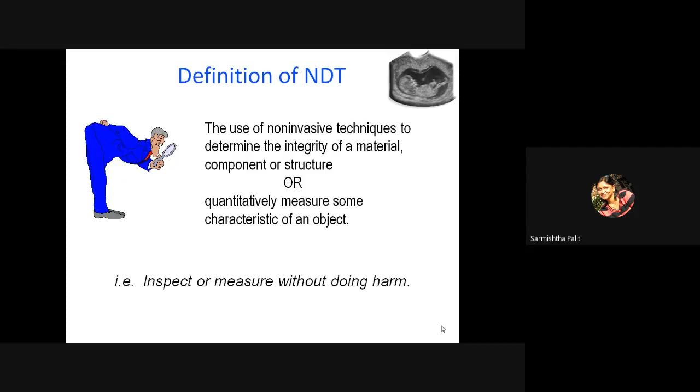And if you see the applications of NDT, it's very, very wide. From underground pipelines to spacecraft, it covers the whole gamut of our globe. You can talk about anything. You can talk about airframe, iron and steel company, oil and gas, underground pipelines, railways, spacecraft. Everybody needs safety. Everywhere you need reduced maintenance and increased life. All these three are interlinked.

If I can increase the life, I can save lots of cost. So everything is also connected to cost. If I know what is the exact situation, I can pre-plan when I will do the maintenance. So it will reduce the maintenance. Same for our own body. If you go for a regular checkup and you know what is the status, you can have proper medication. And then you can improve the safety of your life. Similarly, here also you can improve the safety.

Can I mute your mic, all of you? Thank you.

So exactly you can compare material with human body and can understand this subject much better, because the way we understand ourselves, nobody can understand in that way. And that is the best way to learn NDT for material and component. Chandan, the next.

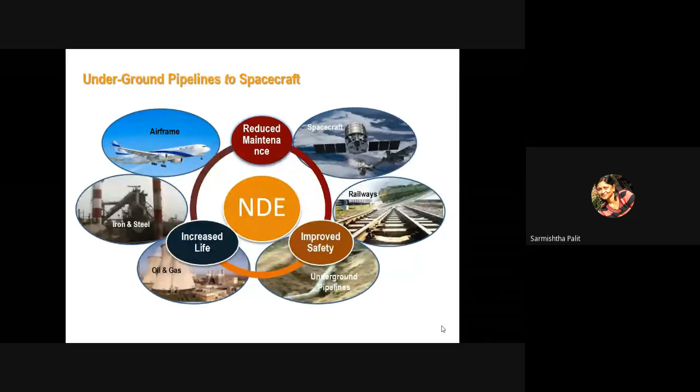So when you find the wide applications of NDT, a large number of techniques are also evolving. Just like in our case, CT scan, NMR, X-ray, ultrasound, and every day you are getting new names of medical techniques. Similarly, for NDT also a large number of techniques are evolving, but the 6 most common NDT techniques I have listed here. And if you look at it, 2 techniques I have marked in a different color because these are very known to you as they are used for your own body.

So as I already told, NDT involves development of measurement and analysis technologies, because I'm trying to give you a sense why electronics and computer science are so important in the area of NDT. It's a measurement and analysis technology. So all measurement and analysis technology needs good electronics people, good analytics, then quantitative characterization of materials and structure in a non-invasive manner.

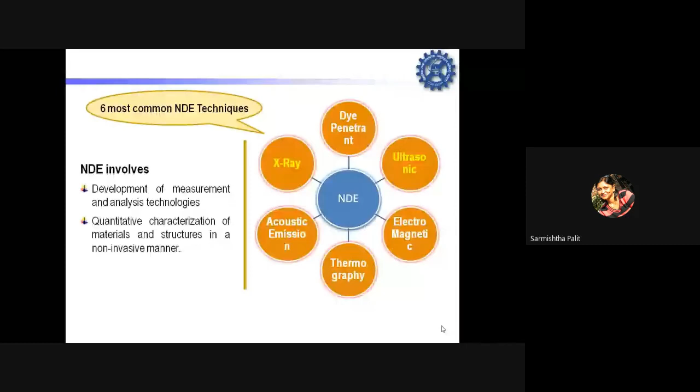So the moment you are talking about quantitative characterization, you need artificial intelligence, you need big data analysis, maybe machine learning, deep learning. So all these are an integral part of NDT assessment in today's scenario. Next. As I told you, most of my presentation will cover ultrasound. And I know everybody is aware about what is ultrasound. I don't have to talk about it.

But it's a mechanical wave. And when the crystal vibrates at a particular frequency, that frequency of wave propagates. And the frequency range is normally 20 kilohertz and above. In NDT, the normal frequency we use is 20 kilohertz and above, and nowadays it can go up to 100 megahertz. So the frequency range can go even up to 100 megahertz. And many applications, as I have already mentioned.

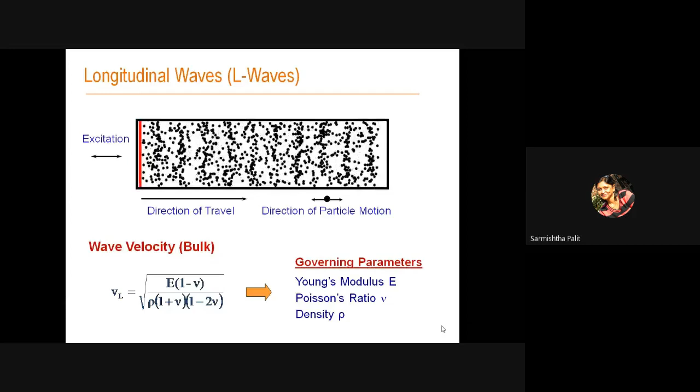And the other is the transverse wave. Here the direction of travel and the particle motion are perpendicular to each other. And as you know, there is no propagation, because you can see only the shear modulus is coming. So there is no propagation through liquids and gases. So whenever we talk about fluid mechanics or fluids, if you want to get the fluid velocity, you have to use the

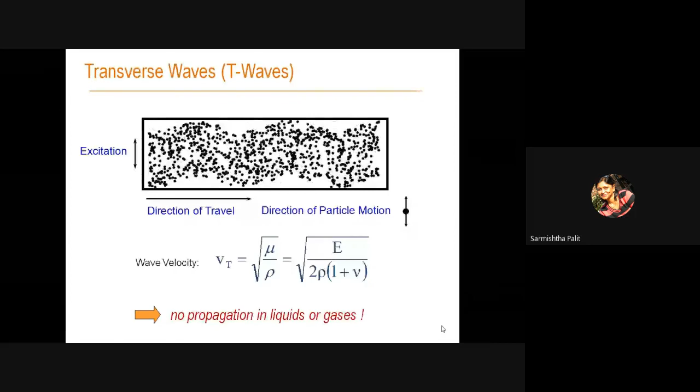longitudinal wave. And these things are important because when you design a sensor, you need to know what type of sensor you will use, so what type of wave has to be propagated. Accordingly, you need to make your own sensor. So all these parameters are important to look into when I am having my own sensor or I have to fabricate my own sensor. Go to the next. You can skip, you can go to the next also. I'll talk about it. Then skip.

Yeah. So now coming to the different types of transducers for ultrasonic testing. As I told, the transducer or the sensor is the heart of the measurement. That means I have to generate the sound wave. The first thing is the generator. If I don't have the sound wave, how can I get the information of the body? That means I need the sensor. So there are various types of sensors available. How will I construct the sensor? Go to the next.

So this transducer could be of different types of material, but it should have the property of converting from electrical to mechanical, or mechanical to electrical when I am receiving. The best possible way is using the piezo sensor, piezoelectric material. Go to the next, Chandana. So it could be piezoelectric material, or it could be laser. It could be an electromagnetic sensor like EMAT.

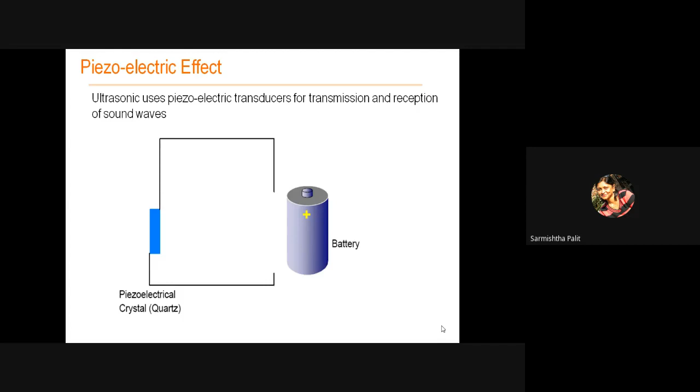How does the piezo effect work? Basically, the crystal has some thickness. Whenever you make the crystal, suppose it's quartz, it's of a particular thickness. Now click, and then click. If you connect it, depending on the polarity, the crystal thickens and then thins again. Click it. Yeah. So depending on the polarity, it will be thicker and thinner. But now think, if we are giving a sinusoidal wave, there will be a continuous change in dimension, and that will go as a sound wave which propagates as per the frequency of your excitation. Go to the next.

So when we talk about basic piezo material, we always talk about the quartz crystal. But there are many disadvantages of the quartz crystal. The first thing is it's highly anisotropic. With a highly anisotropic material, if I want to generate the wave, it will be very, very difficult. Cutting is also another problem. So that's why we came up with the man-made materials.

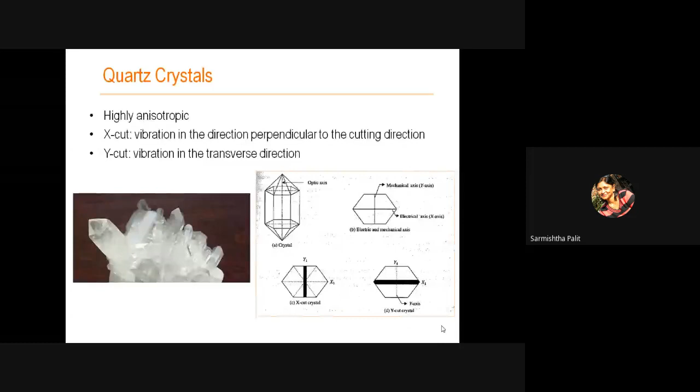Here is the research: what type of material you can produce, you can make in your own area. So semiconductor people are fully required here. It also depends on how good you are in material development, being an electronics engineer. So among man-made materials, many have come up, like barium titanate and lead zirconate titanate, PZT, which is the most used material. Also now lithium niobate, because if you want to extend to high power and higher temperature, there is a need to develop many new materials which can sustain high temperature.

Because for most of these materials I am talking about, their Curie temperature is about 400 degrees centigrade. Now, when you go for high temperature components, real-time data analysis, you are handicapped. This material you cannot use. So there is a completely open gap where you need to do some research and develop material which can sustain high temperature. This Curie temperature you can change. So think of material which can be used for high temperature. Next.

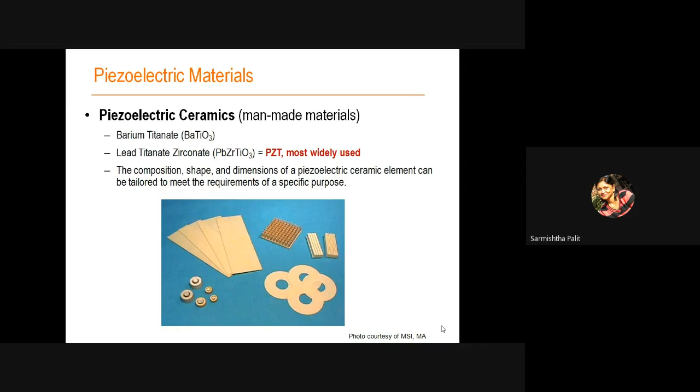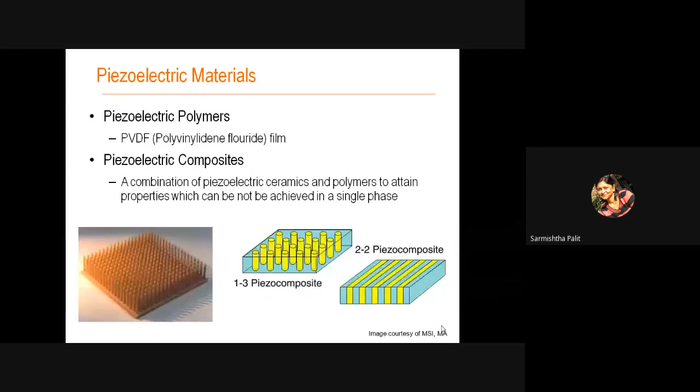So similarly here, the man-made ones, these are the polymers. Go to the next. A large amount of research work is going on, even in academic institutes, to have thin film, spray type piezo material, which you can simply spray on the component and that can act as a sensor. So it's a very, very open field where a lot of research can be done.

So in most of our research, we find that in academic institutes we sometimes stop our research at material development, and that material remains in the lab. And there we are lacking, because we don't go up to fabrication. If we don't go up to fabrication and its applications, then most of the research I find is confined only to papers and not beyond that. It is now very much required to come out of this comfort zone of research and do research which is industry applicable, which has some applications, so you can make at least one device or fabricated thing which is useful for society or for industry.

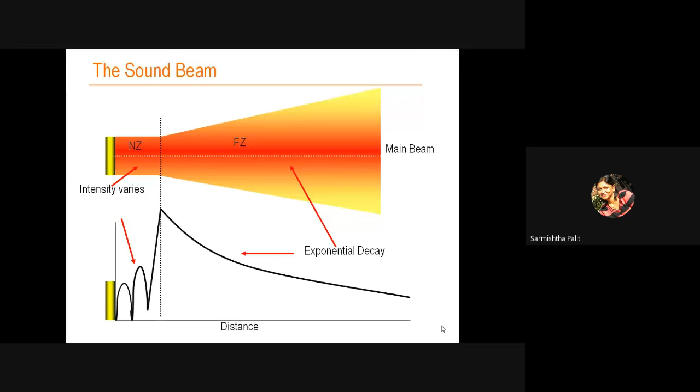Yeah. So there is an equation for the near zone. What are the things in my hand? In my hand is the diameter of the crystal. I have the frequency and the velocity. So the near zone is dependent on all these parameters. So I can play with this and know, if it is a high frequency application, what will be the diameter, because that is the main part which is in my hand. So all these you can characterize when you are fabricating a sensor.

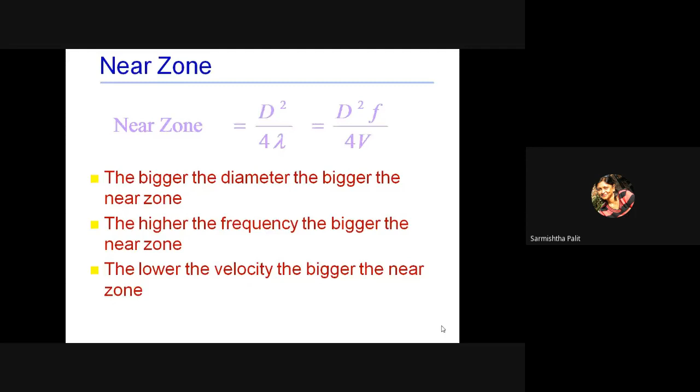Similarly, the beam spread, because if it's spreading more, your energy is basically becoming more diffracting, so not confined in a particular position. So more divergence, not convergence. So I have to reduce this beam width. If we have to reduce this beam width, that again is dependent on the diameter and frequency. So depending on what frequency I am using, you can steer these parameters, how you want to make it and for what applications you are going to use it.

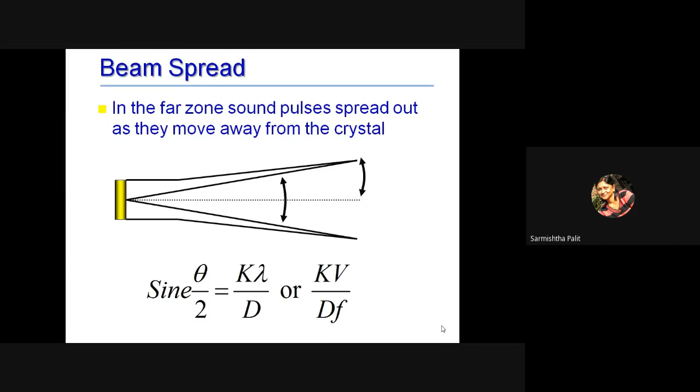Go to the next. Next. Yeah. So go back.

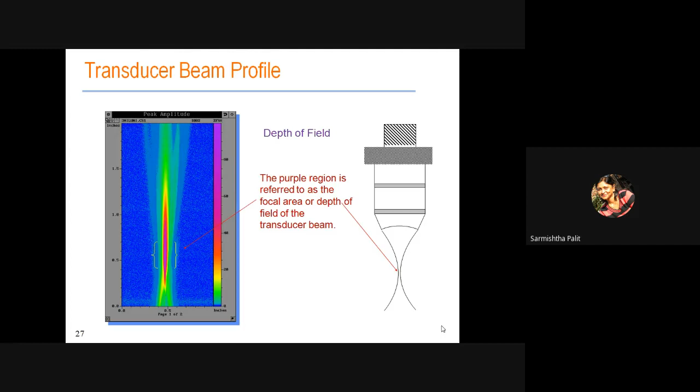Yeah. And all this analysis you can also do. So one was how the beam path will be, and second is, suppose it's a converging beam, then how I will make it, what is the focal point of the sensor. So that is also all you can steer by making your own material, by changing the thickness of the material and the dia of the pellet. So all these are very, very important parameters when one is designing, developing material for ultrasound applications, and after that wants to apply it for industrial or practical applications.

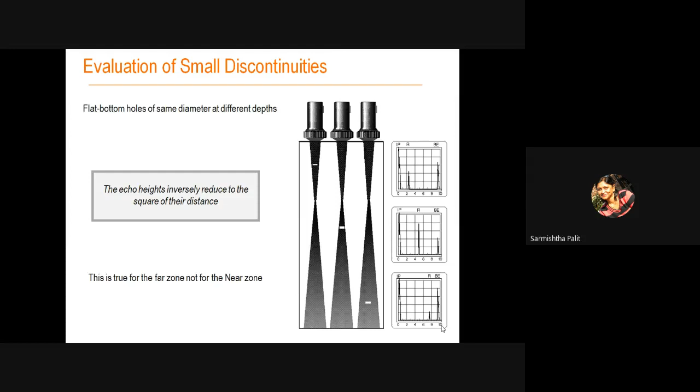Now, all these things I was talking about point to point. It's very tedious, going point to point and measuring it. But as we all know, with vision, when we see something, that is more interpretable.

So then how will I see? That means I have to make an image. How can you make the image? That means you have to scan in a raster mode. So that's called the C-scan. So there are three terms very much used in ultrasound: the A-scan, B-scan, and C-scan.

What is A-scan? It is actually the raw signal, what you are observing. So time versus amplitude signal is the A-scan. What is B-scan? When I do the line scan, that means I am not going to the depth, only X and Y that I am following. What is C-scan? When I get X, Y, Z and the amplitude. So that is basically my full image intensity graph. If you plot, then you will get the whole image of the thing. Just one next slide example will give you a very clear-cut picture.

Go to the next. Go to the next. I don't want to explain this. Go to the next. Yeah, next. Yes. Click.

Next. Stop. Yeah. So here you can see basically there was a block which has some side drilled holes, some flat bottom holes, and the steps. In this case, what are the A, B, and C scan? The left corner top is the A-scan, which is the raw signal. You can see there are multiple reflections coming from the back wall.

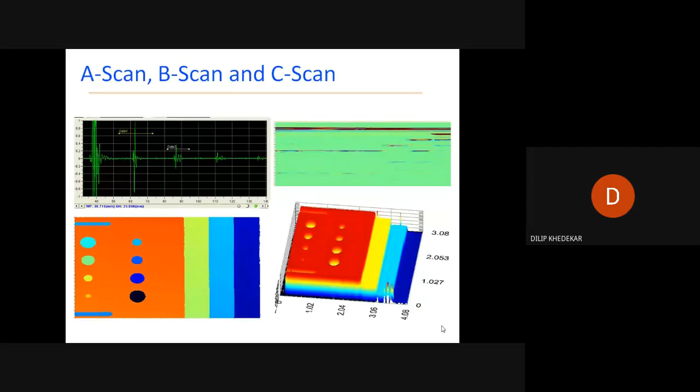The right top is the B-scan. The left down is the C-scan. You can clearly say there are different holes. The color is giving you the depth of the hole. And the right down is basically the 3D view of this. So exactly like I have shown you the baby in a fetus. Go to the next.

Now, how can you use all these things? So basically, ultrasound has enormous applications. You can have flaw detection, you can have corrosion mapping, you can assess the bond integrity, you can measure the thickness, estimate the grain size. Whatever you talk about, you can get from the ultrasound. Go to the next.

Yeah. Click, Chandan, click faster.

Yeah, stop it. So when you do the imaging, one disadvantage of ultrasound is sound cannot propagate through air, because there is a very high impedance mismatch between the metal and the air. Because of this impedance mismatch, most of the energy will be absorbed in the air and no energy will further go into the material.

So you need a coupling material. If any of you have gone for ultrasound, you have seen they put some gel on your body because that acts as the coupling between the sensor surface and your body, so no wave energy is absorbed by air. Now, if I have to do the imaging, I cannot put this probe onto the sample. Then I have to use a non-contact method, that means I need some liquid coupling.

Here's an example of how you can generate the macro structure of a body. Basically a cast billet, and in the cast billet two types of structure appear. The image nicely shows the structure: columnar and equiaxed zone, and also the central zone, which is basically the porous zone.

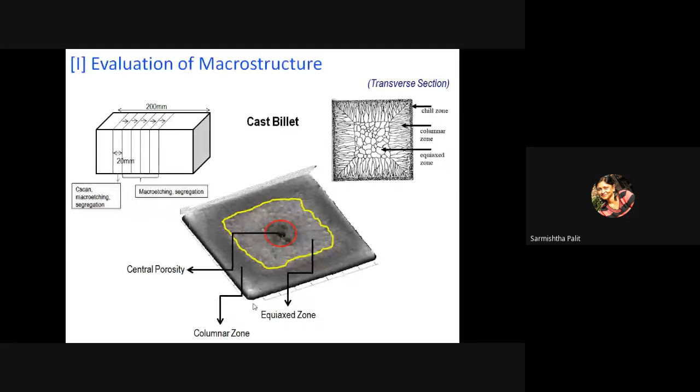Same has been used for corrosion. You see many places with corroded pipe. Corrosion could be different types: surface corrosion or pitting corrosion. If there is a pit, this is a very dangerous thing. It acts as a failure point, an initiation of a crack zone.

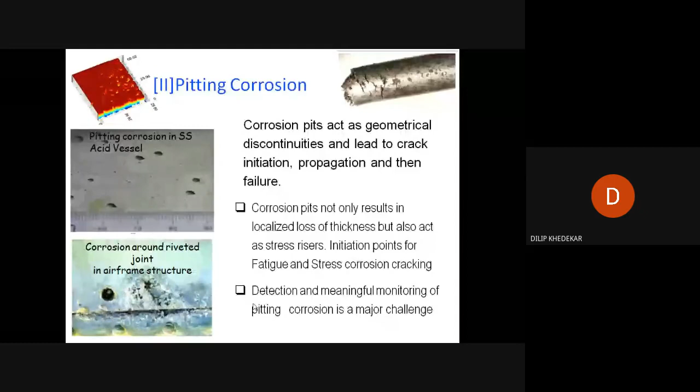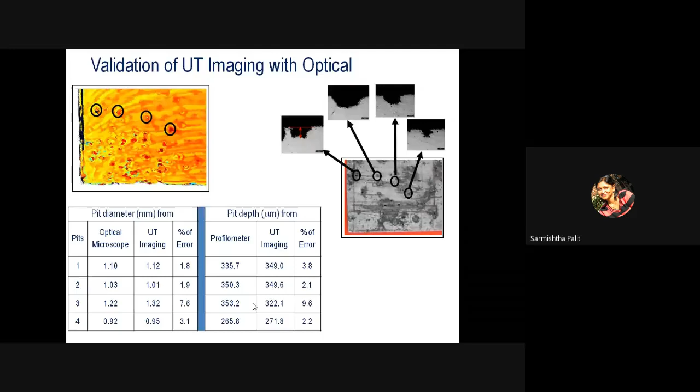This you can also image by ultrasound. We have done this by comparing with a destructive technique and showed that by UT imaging you can exactly reproduce the data which can be done by two destructive techniques, one optical and another profilometer. That means depth and size, both you can get by only UT imaging.

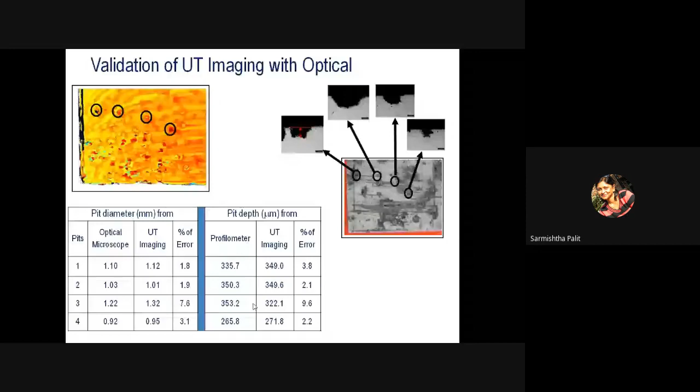When we used the systems we purchased from abroad, which we import, we found some loopholes, things we were not able to use properly because of limitations of the equipment. There you need your own things to be developed.

Here is one example of software developed by my students. When doing this analysis, we found that if the defect shape is not proper, we were unable to analyze the depth and size using the inbuilt software supplied with the system. So the software has been developed at NML for proper analysis, a full image processing software on MATLAB. This shows what background is required.

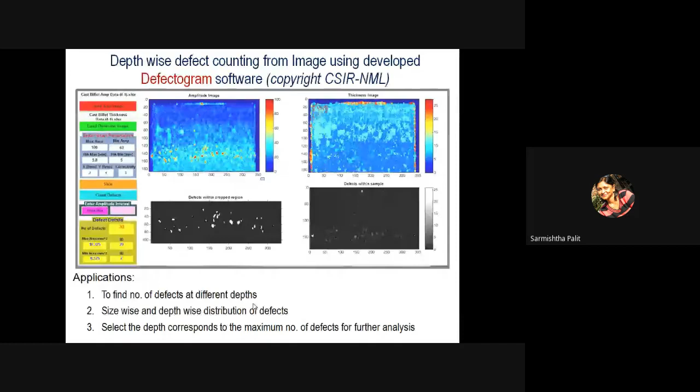Till now I was talking about a single sensor doing point-to-point scanning. But is it possible for the human body to use a single point sensor? You cannot, because it will take a lot of time to diagnose the problem. So for the human body we use what is called a phased array sensor, an array sensor. Now how can you make an array sensor?

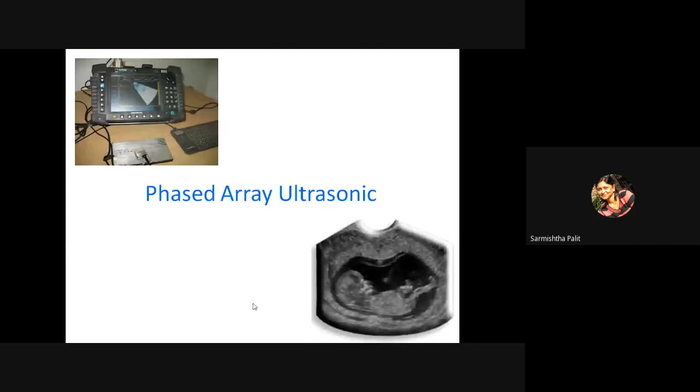Just click, Chandan. Stop, go back.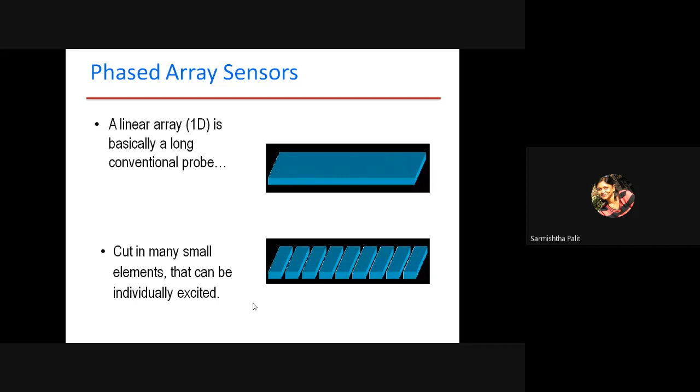Each element is given a different delay, and based on how you give this delay, it can merge as a converging wave or diverging wave and focus onto a particular flaw or place you want to check. Like if there is a stone, it focuses exactly on the stone. To generate a beam, the various probe elements are pulsed at slightly different times, full electronics. By precisely controlling the delays between probe elements, we can choose the focal point or focal spot size of the element.

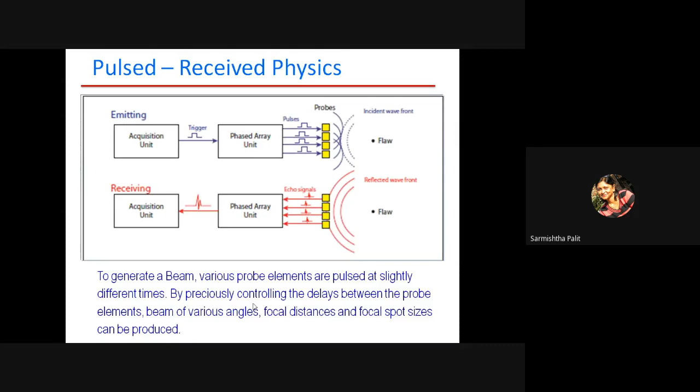This is already explained.

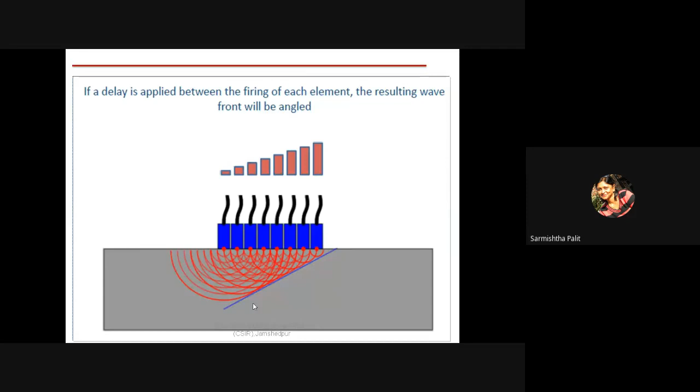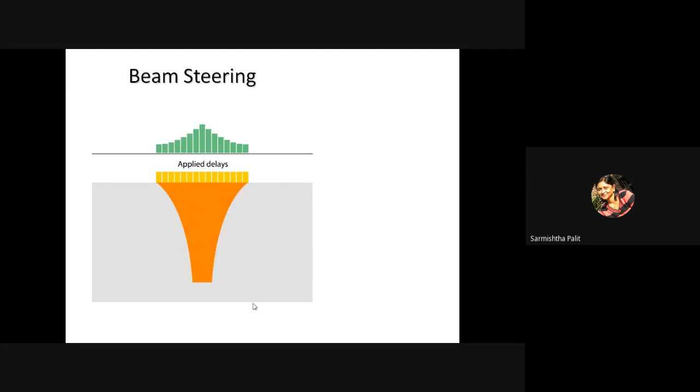You can even do beam steering, because if you create beam steering then you can do a sectorial scan. If you do the sectorial scan, you cover a large area in one go, from 35 to 70 degrees, a large range of inspection angles.

Multiple modes with a single probe, meaning you can create both longitudinal and shear waves.

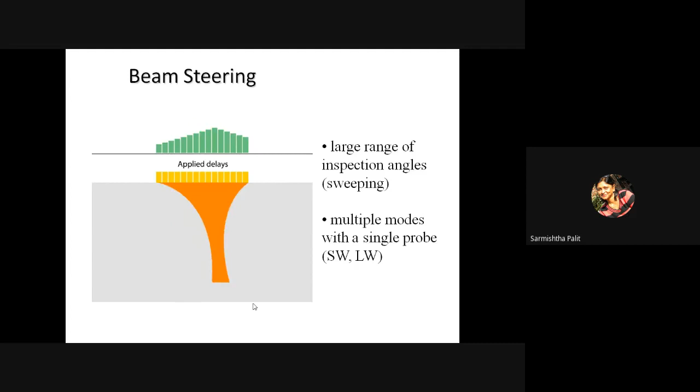Two types you can create: the sectorial scan and the linear scan. Depending on your application, you can apply either.

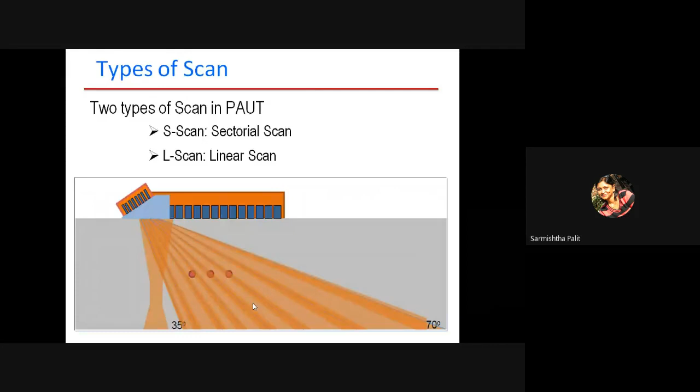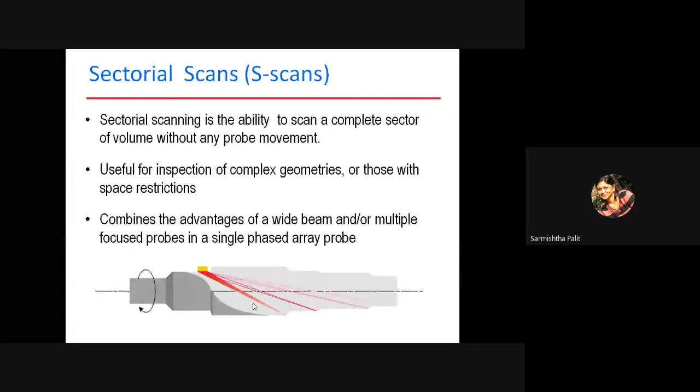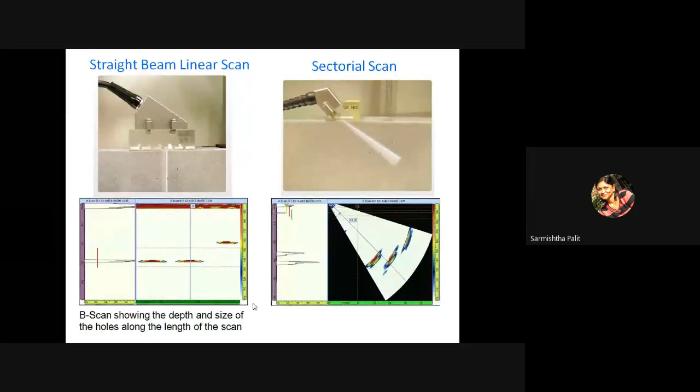These are some of the applications of the phased array where you can see the corner crack. And if you see the holes here, small holes, how it is reflecting here, all positioning you can find out.

Here is just the difference between those two. Here I just want to say a couple of things.

Now, ultrasound, mostly whatever I have talked about is diagnostic ultrasound. That means first you see and then you give the medicine, you can do the diagnosis. But this can be used in both ways. It could be therapeutic also. How is it therapeutic? If I use a high intensity ultrasound, this can be used for treatment of some cancerous cells, tumors, cysts. That means you can directly burn it. So ultrasound has both types of applications - it could be therapeutic, could be diagnostic in the human body.

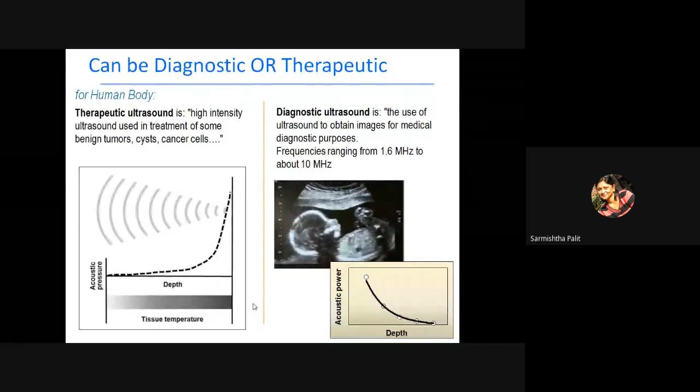Similarly in material. So in case of material, this therapeutic ultrasound can change the microstructure of the whole material by doing a high intensity ultrasound. And on the right side, just like the human body I showed, it is diagnostic, because if I know is there any crack, is there any delamination, is there any void, I can do proper treatment or proper diagnosis to remove those cracks if it is on the surface, or I can discard that material. So the same thing applies in both cases.

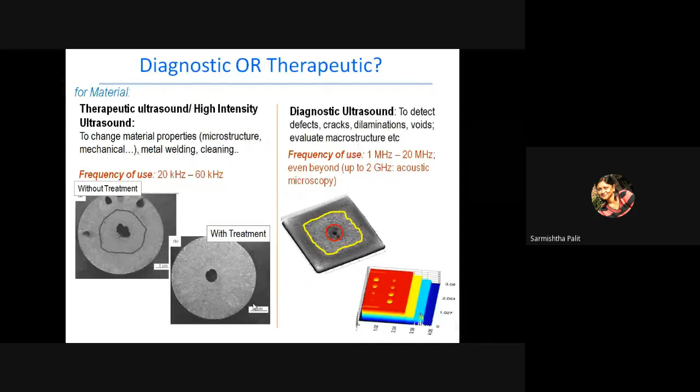Next. Okay, go to the next. Yes, so actually that was all those.

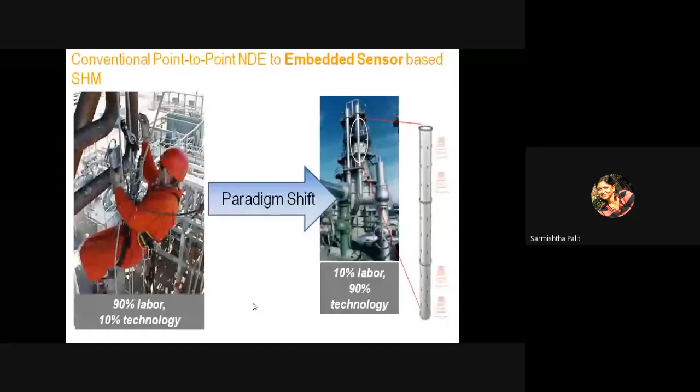I think for nearly 1 hour I talked mostly about some basic things, which is the conventional point-to-point NDT. But today, when I talk about point-to-point NDT, it mostly takes a lot of labor. And nowadays, if I talk about 90% labor and 10% technology, most of the industry will tell me we don't need this technique, because it's only killing our time. So think of something which is technologically very advanced. How can you do that? That means you can do it by embedding your sensor on the body and get the information sitting in your control room. So these are the couple of things I'm going to talk about in my next few slides, how you can do that.

We'll start with one very good work with ISRO. That means here the application of piezo sensor, which I was talking about continuously till now for fault detection, imaging, or getting information on delamination or crack - the same piezo sensor, we are using for life assessment of spacecraft on board.

So what was the motivation and need? Maybe it is known to many of you, but maybe many are not aware, that in the whole space, India has only a 5-degree allocation for keeping its spacecraft. And these spacecraft's life till date is being predicted or estimated through the bookkeeping method. That is, all the result has been done on the ground, and all types of misalignment, main thrust for putting it from the geostationary orbit, all is done there, and how much fuel is getting exhausted - that result is collected, and from there the life of the spacecraft at 12 years has been estimated.

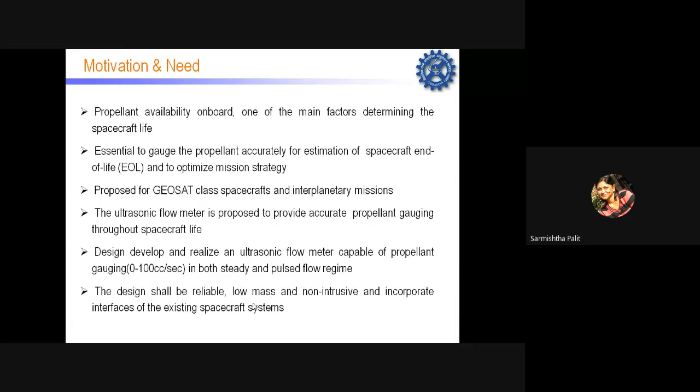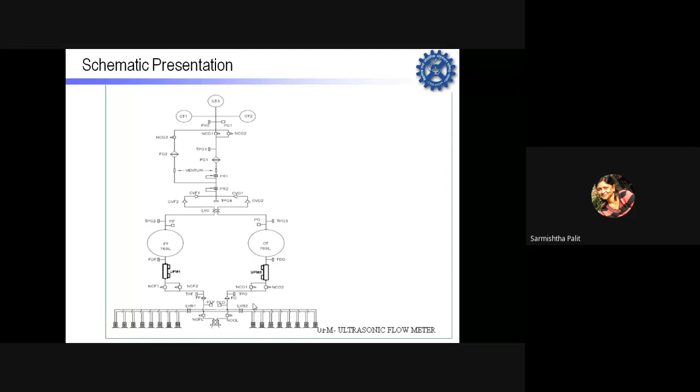Since this is for spacecraft, everything has to be indigenous, from the hardware and transducer to electronics and ground calibration. So all of this we are doing jointly, some part NML is doing, some part LPSC or ISRO is doing. Even the crystal is getting made in-house.

We have already done the ground testing, and it was successfully done up to 6 LPM.

This is the requirement for the liquid flow rate to be measured with the proper accuracy needed. That was already done. In the second phase, we are now developing these devices using space-qualified components so that they can be used for the spacecraft, and all testing will continue.

This is an ongoing process. Our plan was to finish it by last year, but because of the pandemic, everything has delayed. We are hoping that by December we will complete this work, with at least one part covered so we can show results on our space-qualified components.

Maybe next year, if it clears all the space rules and regulations, the first spacecraft can be designed with this flow meter integrated into our Indian spacecraft.

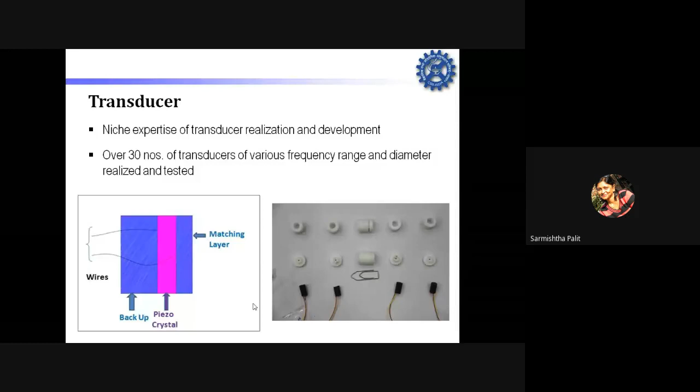Another application of this is for a long pipe, say a kilometer long, buried underground. How will you test it? This is very important because most of the time corrosion is a factor causing leaks, and gas or oil pipe leaking has a huge impact on cost. So how will you do that?

There is a technique called long range guided wave ultrasonic, where the wave propagates through the pipe thickness and can travel a few kilometers without much loss, getting information about defects over this whole large area from just one placement position.

If you use piezo sensors, which is what's generally used nowadays, it's very bulky because so many piezo crystals are needed, like a bracelet placed around the whole pipe surface, as shown in this picture. The whole system then becomes a few kg in weight, making it difficult to carry.

So we have come up with another approach which we call magnetostriction material. Magnetostriction property is the change in a magnetic material's dimension with field, and this can also create ultrasound waves. So you are generating the ultrasound wave using a material that changes its dimension, like piezo material.

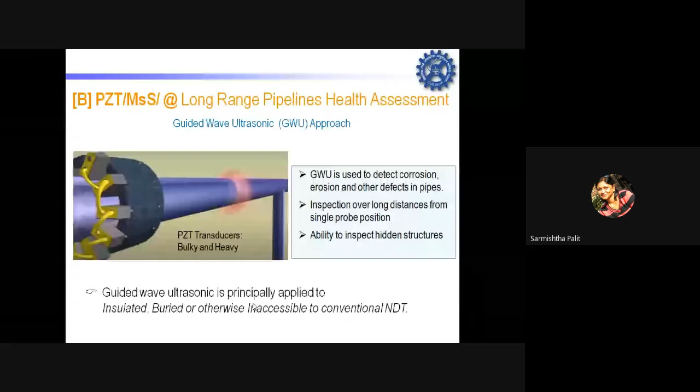This I have already talked about. Let's go back to the previous one.

On the left is the piezo sensor, and on the right bottom corner is the MSS sensor. The advantage of the MSS sensor is that you can just wrap it around, as it's like a ribbon, very thin at 120 microns. So it's very lightweight but gives the same type of sensitivity. You can also play with the material as per the requirement. These are the advantages of using MSS.

NML has very good expertise in developing this type of ribbon material. We have the facility to develop this material, and we can tailor-make its properties by changing the material composition. We are also working on developing this magnetostriction-based guided wave sensor and device. This is another ongoing effort at NML.

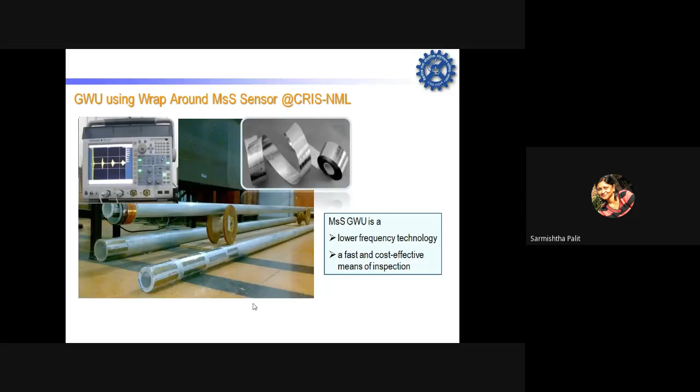So both the examples I have given are on embedding. You are embedding the sensor on the body of the test material and getting the information. In case of spacecraft, you can get the information at the ground through telemetry. And in case of the MSS sensor in the big pipeline, in one place you can wrap around and monitor the whole pipe, a few kilometers of pipe, sitting in one place.

So these are one example of PZT and two examples of what NML is doing in piezo and MSS embedded sensors. But most of our embedded sensor work is on fiber Bragg grating. This is because one of our sister laboratories, CGCRI, has a very good facility to develop optical fiber and also to write gratings. So we are using that facility and collaborating with CGCRI to use this material for a couple of different applications. I think I don't have to explain FBG in this forum, but still, what is fiber Bragg grating?

In one word, we normally say fiber Bragg grating is a wavelength selective filter. It's a band rejection filter which follows the Bragg wavelength formula. That means lambda B is 2 n-effective Λ, where Λ is the spacing between the perturbations and n is the refractive index. So what actually do we do?

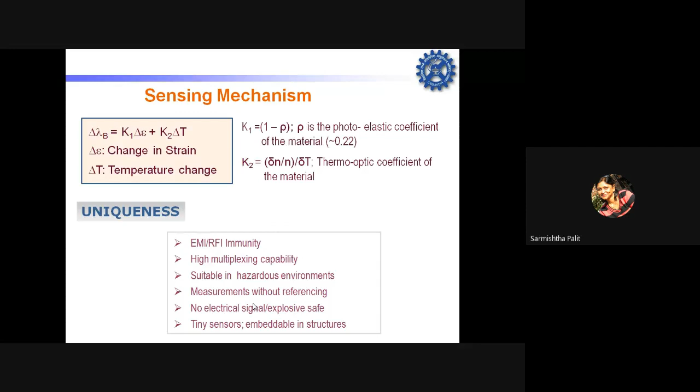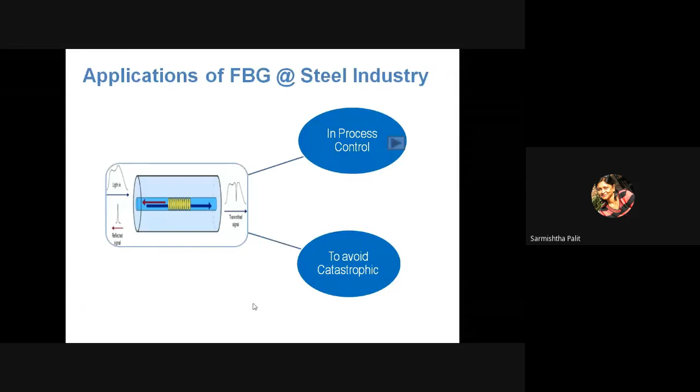So I'll give you two examples of fiber Bragg grating. One is in process control and one to avoid catastrophic failures. So go to the next. Before going to process control, I would just like to tell you how difficult the area is to pinpoint. I have given this picture because many of you may not be so aware of the steel industry, just like I was also not aware when I was a student or an electronics person.

Of our world steel production, 90% is through continuous casting. In continuous casting, the liquid steel falls on a tundish and from there it comes through a meniscus. It's called a mold. And this mold is the main parameter which gives the property, whether it is a slab caster for sheet or a billet caster for rod or wire.

In this mold, this liquid actually semi-solidifies and takes the shape when it comes out. Go to the next, Chandra.

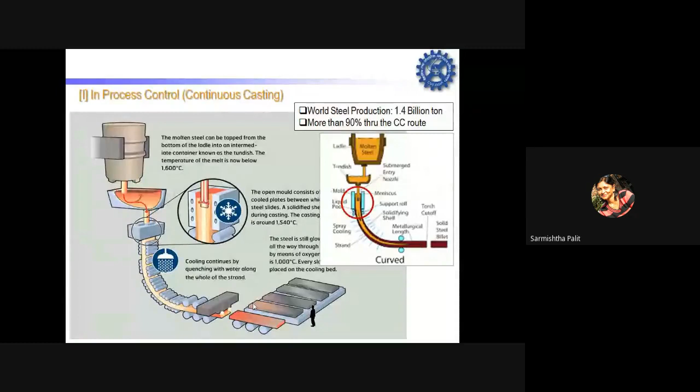And this mold temperature basically gives the property of the billet or the slab which is coming out. There could be very fine cracks which you have to avoid, and that is because of the temperature within the mold. The shape can be changed because in case of a billet, it's a square. That square could be rhomboidic, or another is the breakout, because many times it solidifies within before coming out, and if that happens, then it creates havoc.

You have to clean it, you have to stop the production, and that takes minimum 6 to 7 hours. So there is a huge production loss. Go to the next.

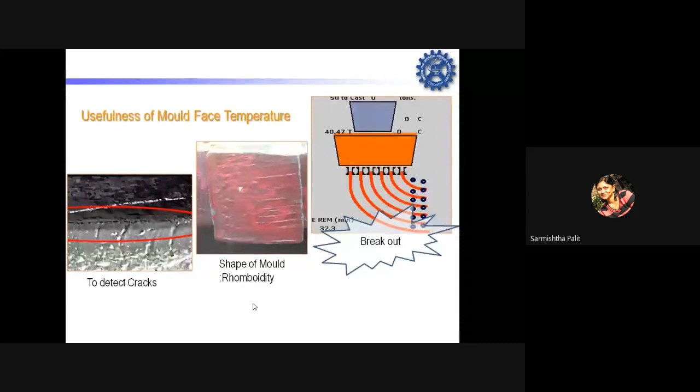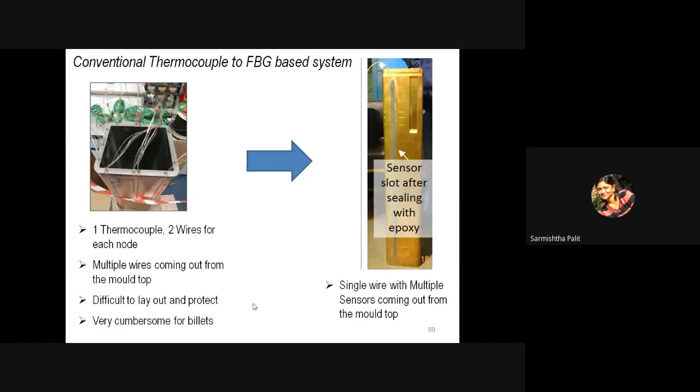This actually can be done in the industrial environment, in that hazardous environment. If I show the next slide, you can understand how hazardous the situation is where we have placed this sensor. Show the next. Chandan, click on the video.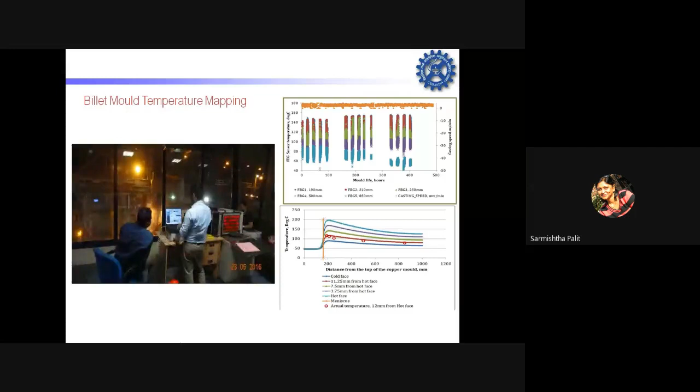1200, 1800 degree liquid metal, if it comes together with water, then what will happen? It will be an explosion. And all these results you are getting at the control room. So here is industry 4.0 actually. And you can take a call, and these are the whole live data, real-time data, which has been captured throughout the life of the caster and has been verified through the model.

The red dots are all experimental data at that depth where we have placed our sensor, and all others are from the mathematical model. So this is the first time a billet mold model has been verified through experimental data by embedding fiber Bragg grating sensors on the mold, and those data captured real time throughout the life of the caster.

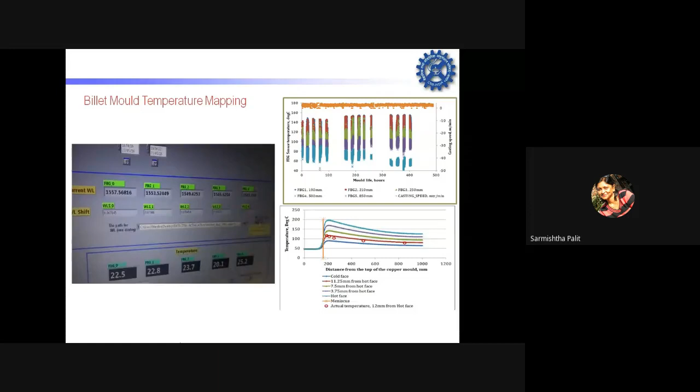This work we completed in 2016, and now in another caster one experiment has already been completed, and we are going for further experimentation and further work on implementing this completely as an instrumented billet mold, which may come up in the market, we are hoping, in the coming few years. Go to the next.

Another example of the embedded sensor for temperature monitoring by fiber Bragg grating. This is again another huge problem. See the right side, it's a typical picture from the shop floor of a blast furnace. You see how many cables are there. There are so many cables there, and now in that pipe they want to monitor the temperature.

Again, you may say, why not, ma'am? There could be an IR camera I can monitor with, but an IR camera cannot go or focus on the inaccessible area in which you want to monitor the temperature. So the next is thermocouple.

So thermocouple, if I put there, how many thermocouples, and 2 leads each thermocouple? So you can imagine how many cables will come out, and that is also not allowed. So again, we took up the challenge here with fiber Bragg grating. Here the fiber Bragg grating can work up to 700 degrees.

Generally, it is up to 200 degrees. There is no problem, polymer coated fiber can be used. But here we have used special fiber. We have used a special type of junction box so that it can work up to 700 degrees centigrade. Thanks to CGCRI for that.

And what is the problem here? In this pipe, hot air blows. And you can see, this is called a blowpipe, how this blowpipe has burst, and after that a crack is initiated. Can you imagine? 1200 degree air is blowing through this. And if there is a crack, and if this air comes out, what happens? The operator who is working there is blown up.

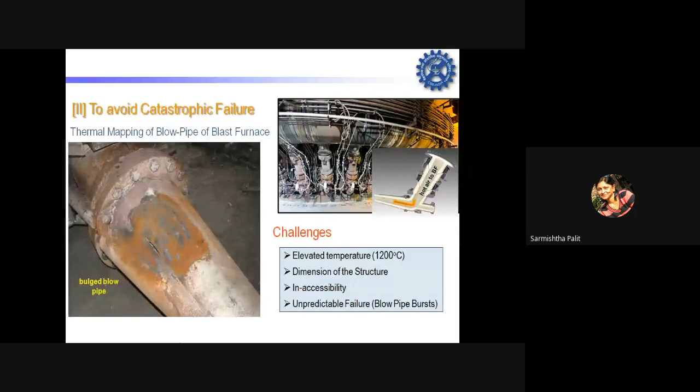So this was our first work where we embedded 6 sensors on the blowpipe and put it on the blast furnace, and continuously we monitored the data. Fortunately, while we monitored, no critical situation happened, but what it can do, what implication it has.

So what we are doing here, we are first doing the simulation of the whole thing, because all these sensors are basically giving you localized data. That means where the sensor is sitting, I am getting the temperature of that location. Now it's a huge pipe of 3 to 4 meters, and the diameter is nearly half a meter. How many sensors in this whole circular structure will I place to get 100% coverage of the blowpipe? It's really impossible. And if it is possible, the cost will be huge.

Compared to the amount of loss the plant is getting, I think the cost of implementing this type of instrumented blowpipe will be far more than that. So our first approach is to do a simulation, find the whole thermal distribution, and then find the critical optimized number of sensors required to regenerate the thermal image of the whole body. That means you need to develop a trained system with a minimum number of inputs. And then in that location we will place the sensors and monitor the whole body through this minimum number of sensors.

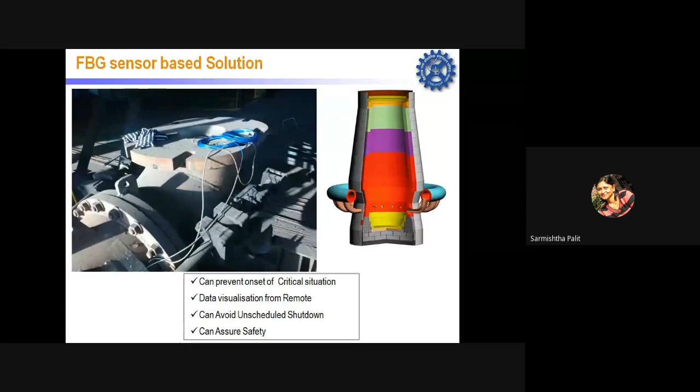And we have not yet finished this work. We are on the way. Only the feasibility has been done, and we are in the process. It is a 1 year project. Let's see after 1 year where we are. Next.

So now I'm coming to a briefing of this, as I'm talking about sensors. It is definitely true that it's the heart, once you get that data from the sensor. It could be any type of sensor. So one part is material development, sensor characterization, and choice of the actual sensor required for that particular application. So this is one hand. The second hand, once it is clear that yes, I need this type of sensor, then do the lab-based calibration. Because NDT means it's an indirect method, not a direct method. That means you need a proper calibration.

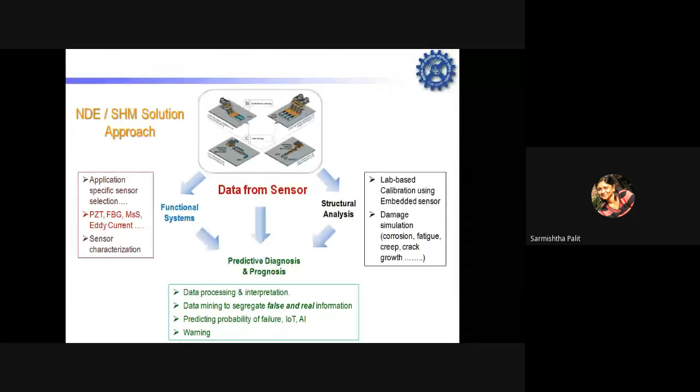So do the calibration, do the simulation in the lab, and then when everything is done, you implement it, process the data to segregate the false and real information, predict the probability of failure, incorporate AI, IoT, machine learning, and then create warnings. This whole thing will give you a really safe industrial environment where your production is secured, your safety is secured, and also your reliable maintenance is secured. Go to the next one.

When I'm talking about all this, this is the future success: from reactive to more predictive. I think I have already explained this when I was talking about blowpipe analysis. So these are all things we request. Today, in this forum, I must put up a request to all of you: please come up with expertise on this, which is really needed today for lab-based research to come out and go to industry-applicable research.

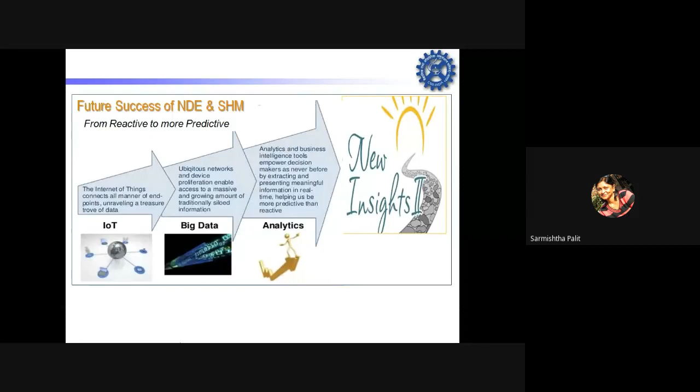And all these things, go to the next, would not have been possible if I didn't have a blend of the right disciplines in the group which I am leading, because this is a group where you need multidisciplinary researchers. My group is a very nice blend. I'm from physics and electronics. Tarun is from instrumentation, Urpita from electrical, Ashish from chemistry and material science, Abhijit from mechanical, Amit mechanical, Prem metallurgy, Rajat metallurgy, and Abhishek electrical.